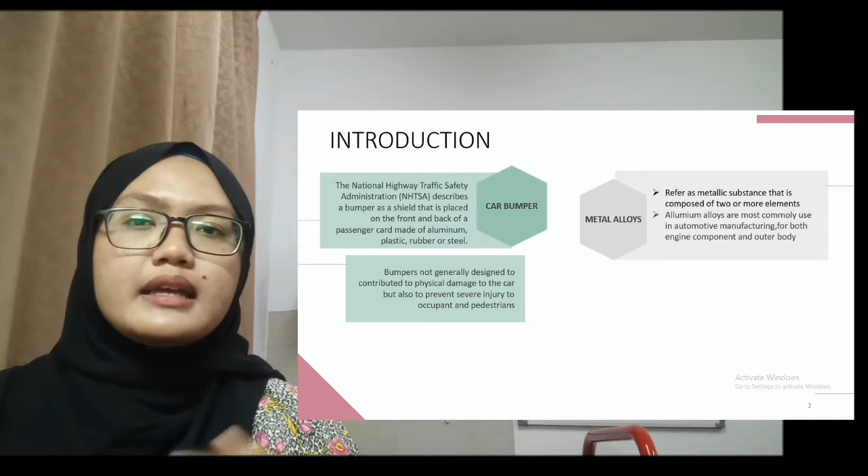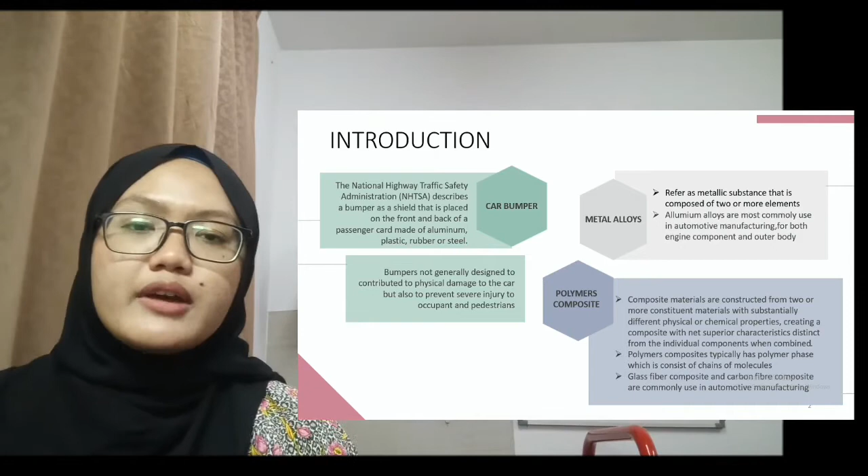While for polymer composite, they are constructed from two or more constituent materials which have different physical and chemical properties, but when they combine, it creates a composite with net superior characteristics. Polymers usually have a polymer phase which contains chains of molecules, and glass fiber composite and carbon fiber composite are mostly used in the automotive industry.

For the properties, in order to build a bumper that works perfectly, the material selection is one of the crucial parts. So as we can see, these are a few of the expected properties that a material should have. Physical property. Firstly, is low density. Density is always related to the mass. So having a low density material means that we're reducing the mass, so we can minimize the effect of inertia, and we can improve the efficiency and save energy.

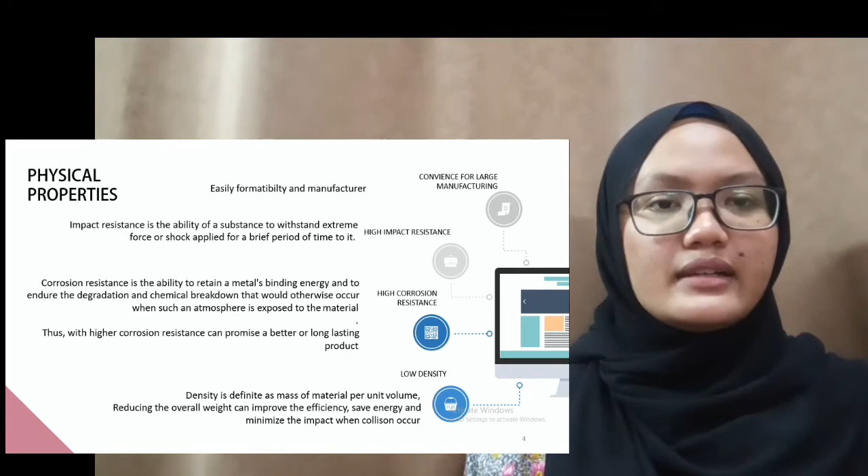Next is high impact resistance. Next is high corrosion resistance. As we know, a car is always exposed to uncertain weather like hot and rainy days. So this property is important to make sure that we have a better and long-lasting product. Next is convenient for large manufacturing. What it means is it's malleable and easy to be treated, so we can save energy and reduce the cost.

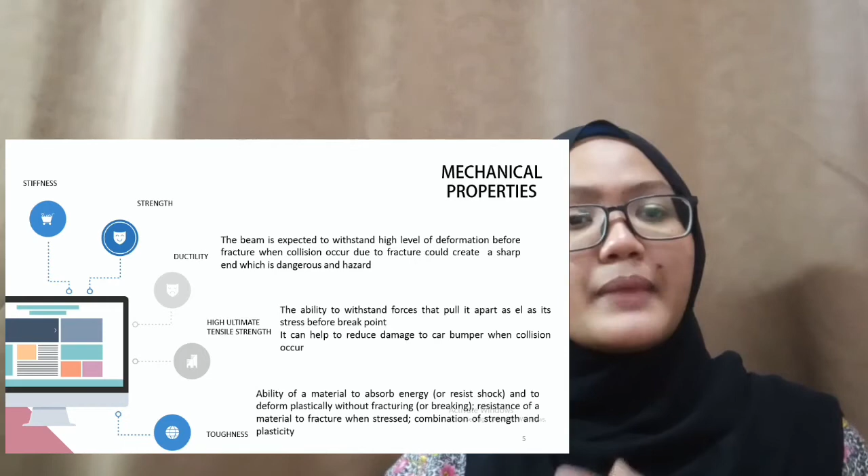For the mechanical properties, we have stiffness, strength, ductility, high ultimate tensile strength, and toughness. This property is important to make sure that the bumper does not easily break when a collision occurs.

Next is process. The manufacturing process varies depending on the type of the material itself. Due to the difference of properties, a few aspects need to be considered. So this time, we focus more on injection molding. Injection molding is commonly used in the present situation. There are other processes that can be used such as compression molding, die casting, and others.

So why do we use injection molding? Firstly, injection molding is an ideal process for car manufacturing as it can form even a complex shape, and it produces an excellent surface finish. It's also suitable for large scale manufacturing as it has a high production rate.

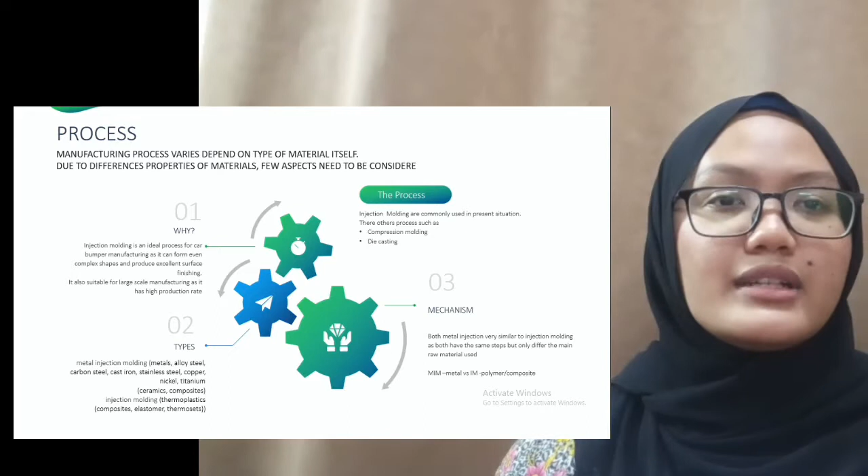So basically there are two types of injection molding. Firstly is metal injection molding. This is more suitable for metal, alloy steels, carbon steel, cast iron, stainless steel, copper, nickel, and titanium. And the other is injection molding that is more suitable for composites, elastomers, and thermosets. The mechanism of metal injection molding and injection molding are very similar, but only differ due to the raw material that we use. So these are 4 basic steps for injection molding.

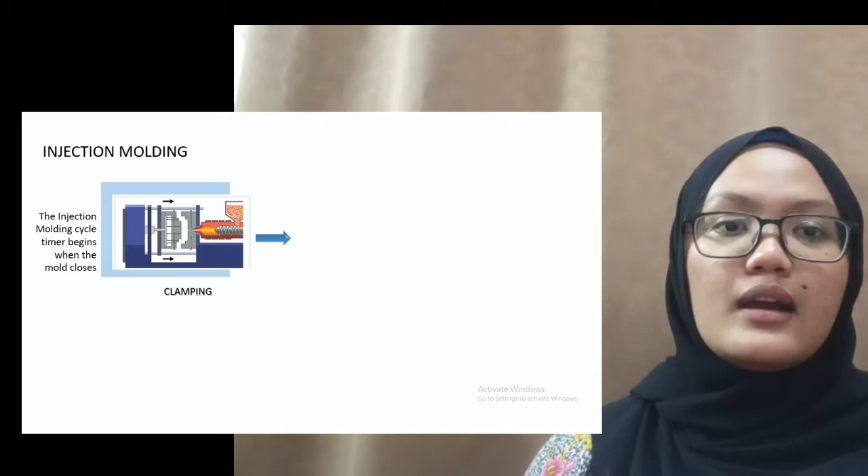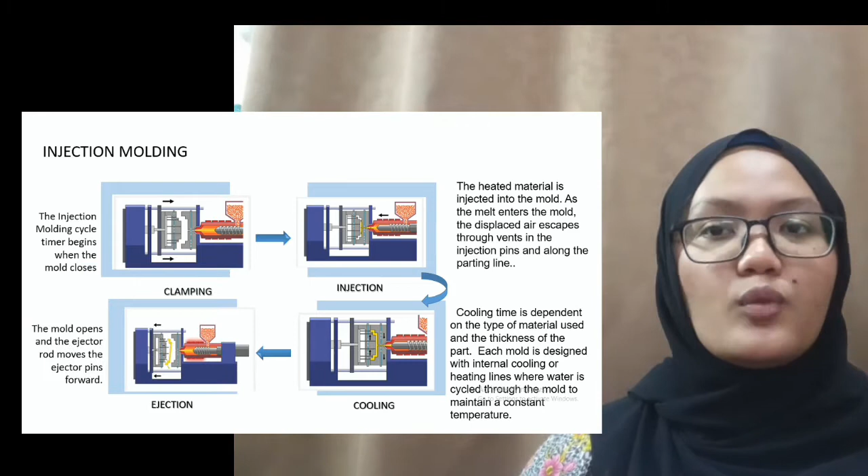First is clamping. Clamping is when the mold has been closed. Then we have injection, when the heated material is injected into the mold. And then we have cooling. Note that for each type of material being used, they have a different cooling time. And then we have ejection. Ejection is where the finished molded part is removed from the injector.

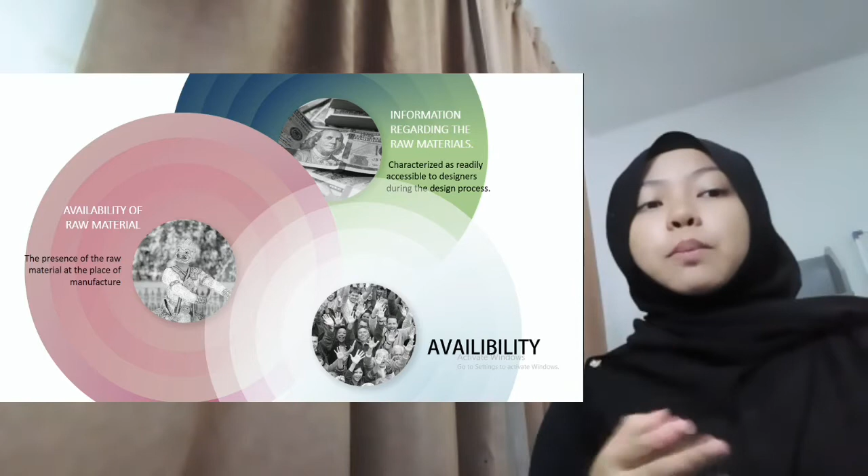In 2019, global production for plastic and polymer reached 368 million metric tons. 69% of polymer is used in manufacture and construction. In 2019, global production for metal and steel reached 1.9 billion metric tons. The rate of recycled metal is 30%. Almost 40% of worldwide metal production comes from recycled steel.

I will explain about the cost of material in this topic. The first one is the actual cost. Actual cost is where we set the baseline for the project cost. The project management team needs to keep the cost of material on track. So we can say that we need a low cost material as well as a good quality material for the car bumper. To keep the production cost low, we need a material that is manufactured in a shorter cycle.

The second one is manufacturing and raw material cost. Manufacturing processes are the steps through which a raw material is transformed into a final product. For a metal, it needs to fulfill a design decision-making process to balance both cost and weight requirements. Most lightweight metals, such as aluminium and magnesium, are more costly than heavy metals. Besides, in bearing and wear applications, due to higher frictional properties of metal components, it needs a high power motor for moving parts. This has an impact on higher metal alloy prices.

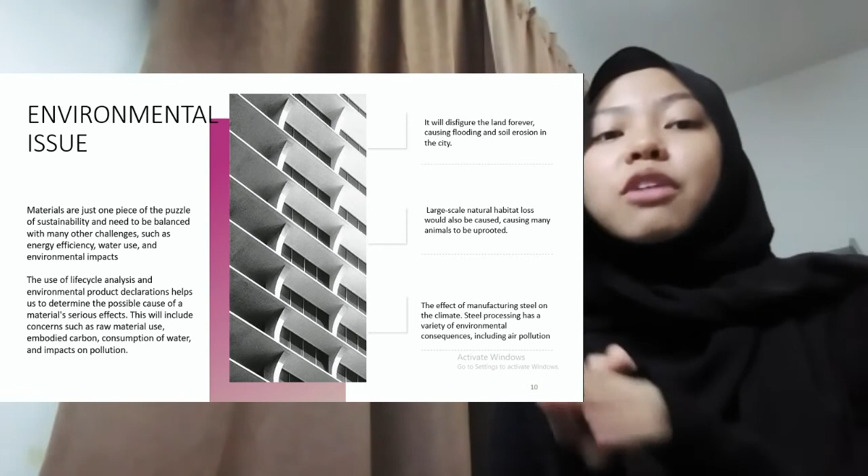Materials are one of the sustainability issues that need to be balanced with other challenges such as energy efficiency, water use, and environmental impact. When we figure out the possible causes of serious effects, the concern of raw material use will include embodied carbon, consumption of water, and impact on pollution. Now, if the company continually removes metal, it will disfigure land, causing floods and soil erosion in the city. It also causes a large scale of natural habitat loss, which has led to animals being uprooted. Steel processing has a variety of environmental consequences, including air pollution.

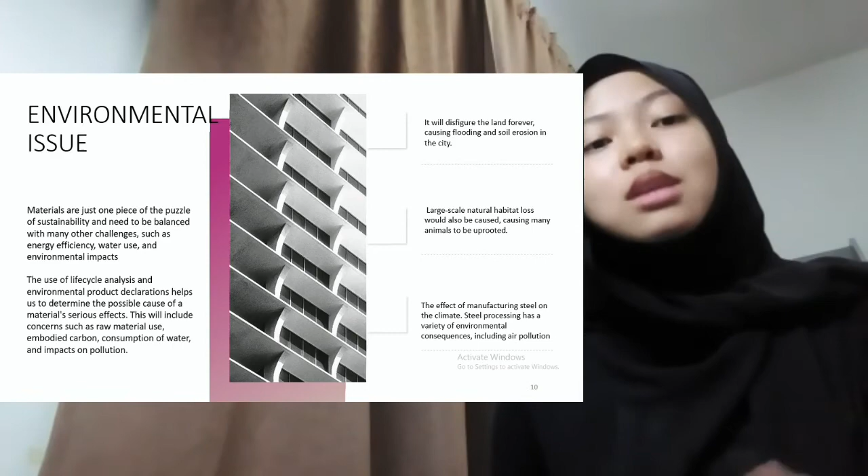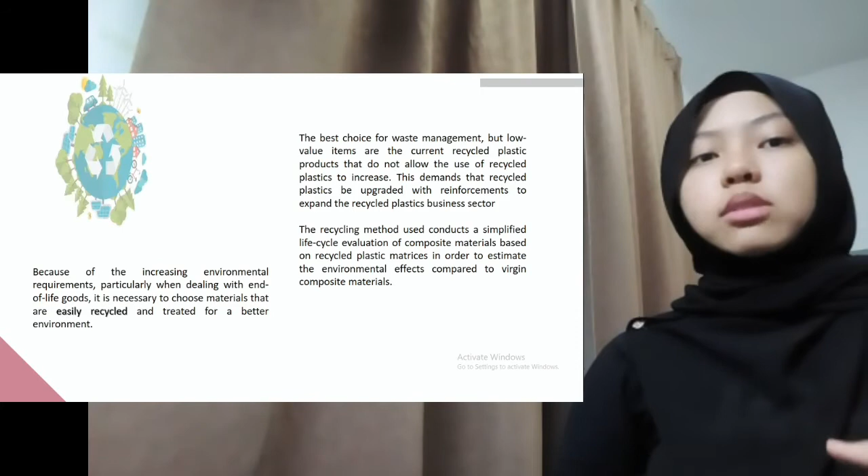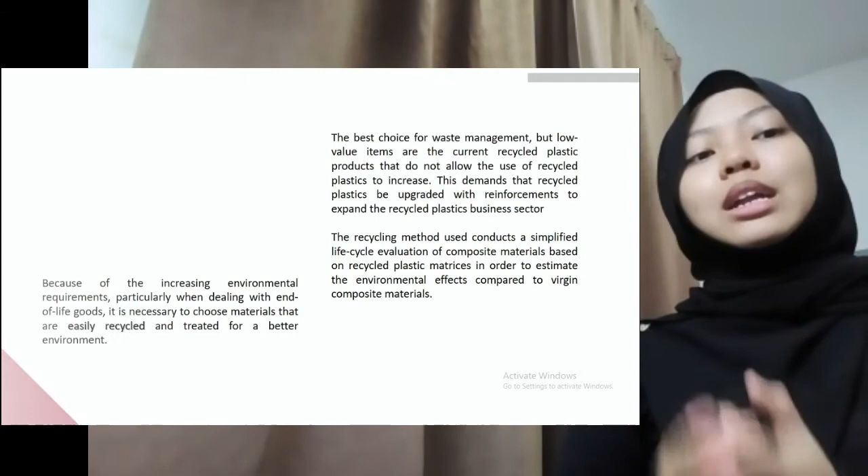Due to increasing environmental requirements, it is necessary to choose a material that is easily recycled. This demands that recycled plastic be upgraded with reinforcement to expand the recycled business sector. Recycling methods are used to conduct a simplified life cycle evaluation of composite material based on recycled plastic matrices in order to estimate the environmental effect compared to virgin composite materials.